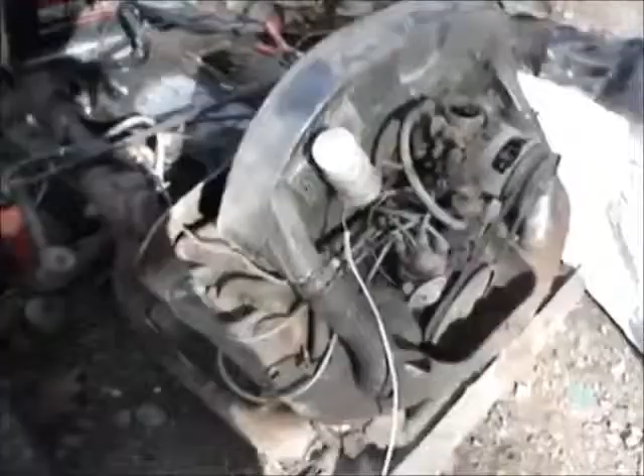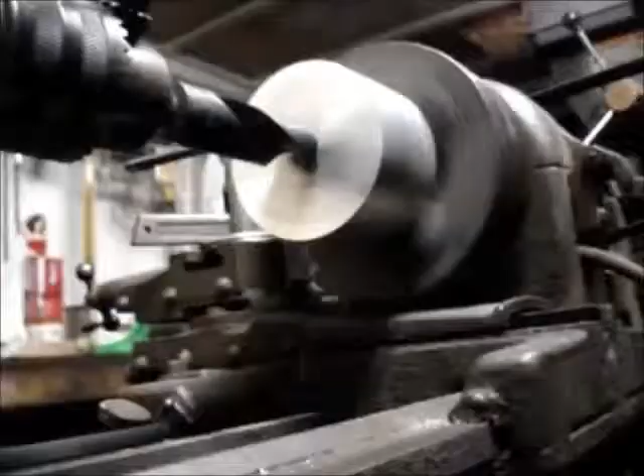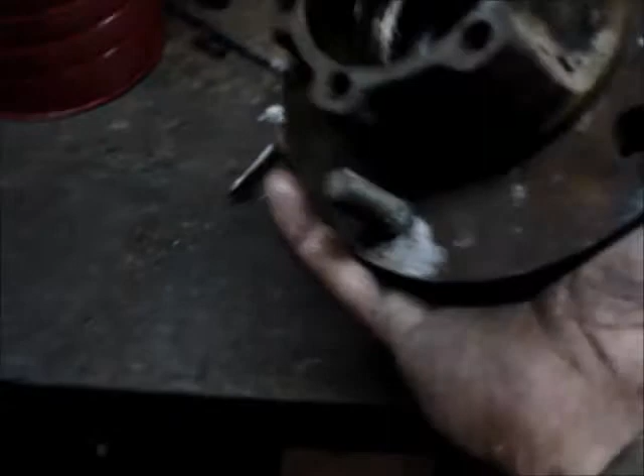The other day, got some new front tires for the Scout, studded snows. I mean, beautiful tires. And went to take the old ones off, and this hub housing, bearing housing, whatever you want to call it, had two of the lugs just started spinning when I went to get the lug nuts off. So anyhow, I got them off, and I'm going to keep this because I can probably ream this out to accept bigger studs or something. But in the meantime, I got to get this thing together.

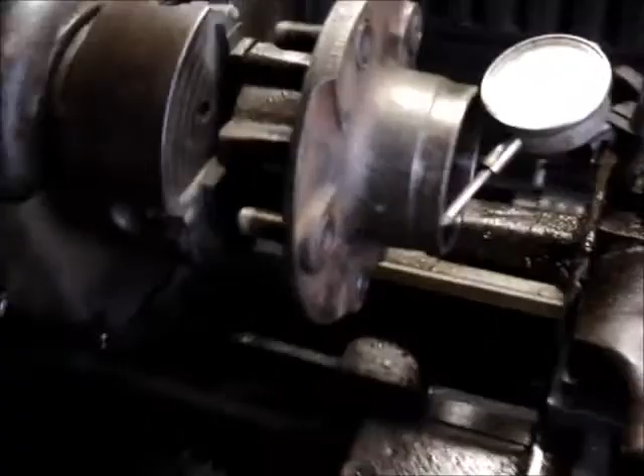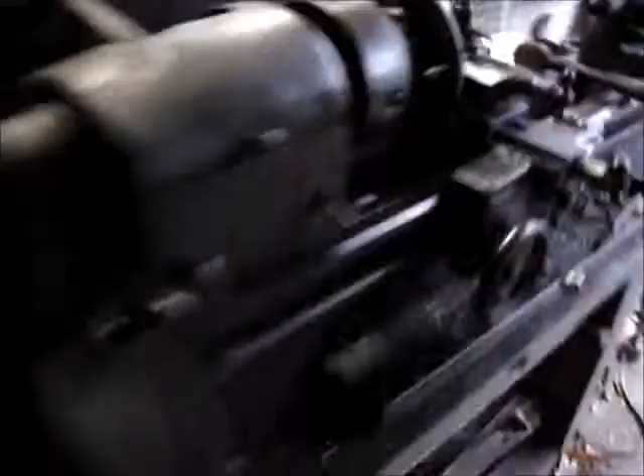Good bearings, good races in and everything, so I knocked out the races and I put them in my spare hub, or wheel bearing housing, or whatever you have. Later on, I noticed slight difference between the two hubs. This hub here is bored out down there for the grease seal. Alright, now that would be a nice fit into there. And this hub, bearing housing, whatever, I'm going to call it the bearing housing. This hub apparently takes a different seal.

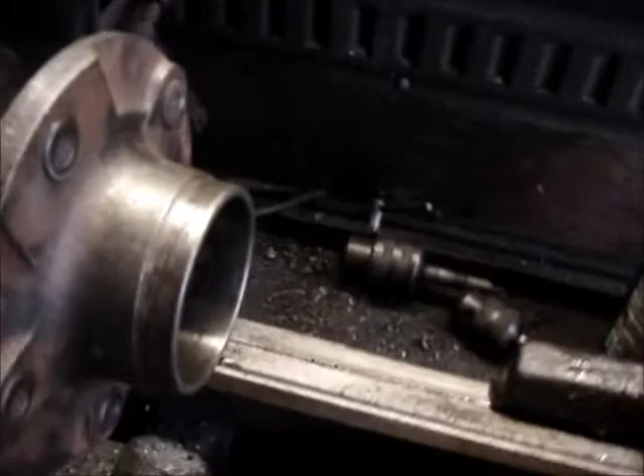And the plan was we would try to find the seal that would just drive right down into there, and we went to the supplier, and he didn't have something that would fit this housing and my spindle. I guess you would call it, yeah, whatever the axle pokes through. You guys probably know what I mean. But this is a great fit onto the spindle, and won't start on there. So this is going to be one job that really matters and is going to have to be precise. So this will be a nice little test

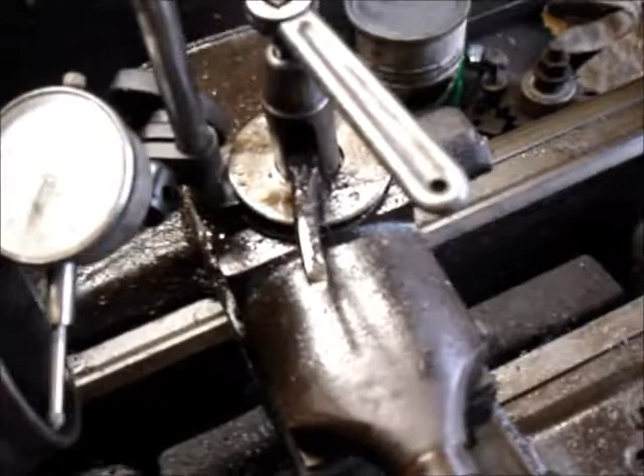of my ability. 55 thousandths out. That's not too bad for just throwing that in. I mean, I can't just start boring that right away. I still got some work to do to indicate that. But that ain't bad, just for chucking it in there, it doesn't usually line up that quickly for me. Alright, looks like the camera picks that up a little better with just a natural light.

Don't drink natty light. Drink good beer.

But as far as I can tell, that is running within or just over a thousandth. Alright, we got the dial set up running the other way. Camera still ain't liking the focus on it too much. But we're really damn close. I can't tell if it's runout or if it's just little irregularities in the surface of the material.

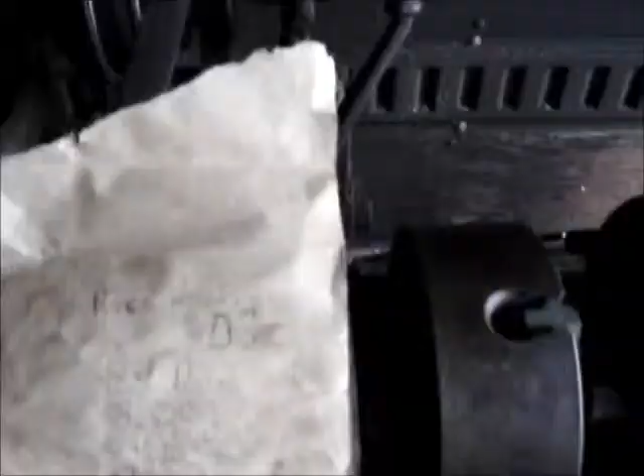Man, seems like you get her dialed in the one way, and then you got to go screw around for a half hour to get her dialed in the other way, and you keep going back and forth until you finally get her. And I'll show you the other axis in a minute here. And here's the other direction, and she's really damn close. I think I got a couple of pock marks in the bore, and it sounds a little rough, but I'm gonna go with that. My race thickness, or height maybe, is 575 thousandths.

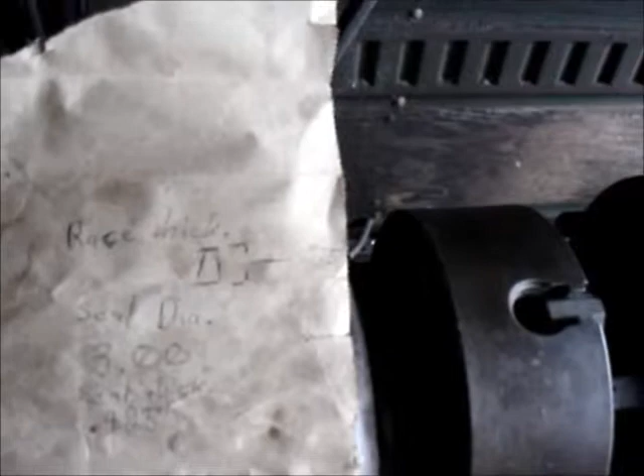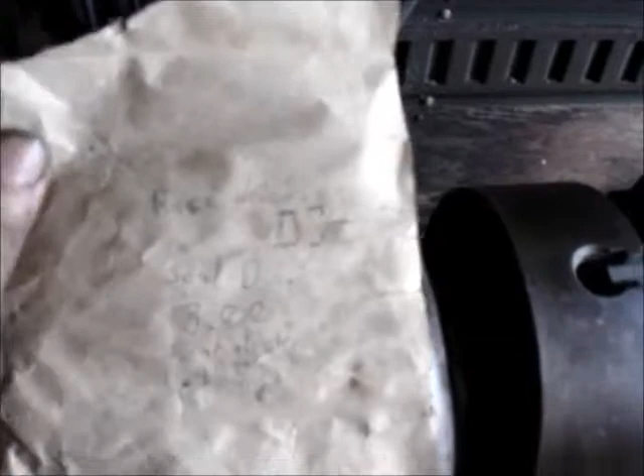So I want to leave at least that much meat inside the bore untouched, so that the race has plenty of surface to press into and rest on and all that good stuff. The seal diameter is 3 inches to the thousandth. I mean, that's three inches right on the money. So I'll be shooting for 2 inches 999 thousandths. Okay, and seal thickness is 425 thousandths. So I like that. I'm working with pretty much nice square or round numbers, you know. There isn't weird crazy stuff going on.

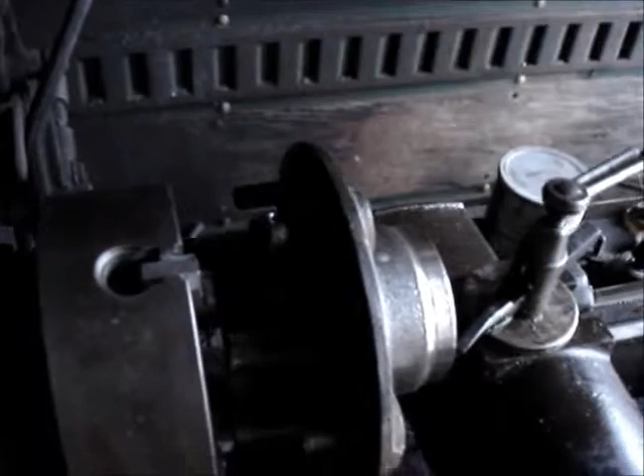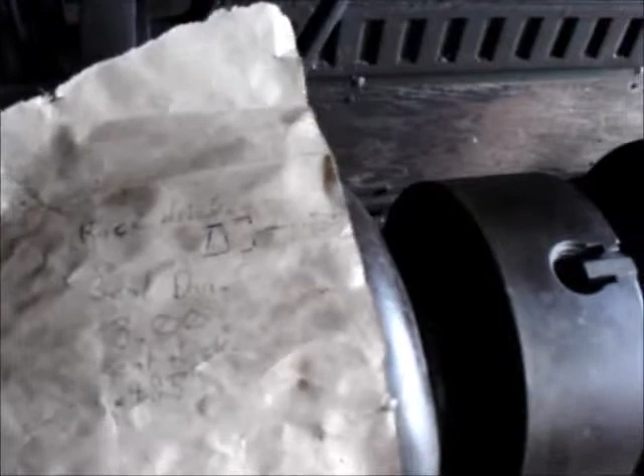I just have to remember to leave 575 thousandths untouched inside the bore of the bearing housing here. And I'm going to bore it out to 2 inches 999 thousandths to press that seal in. And I'm going to try to bore it 425 thousandths deep. So the seal will be sitting all the way in there. I really wish I had some travel dials set up on this thing.

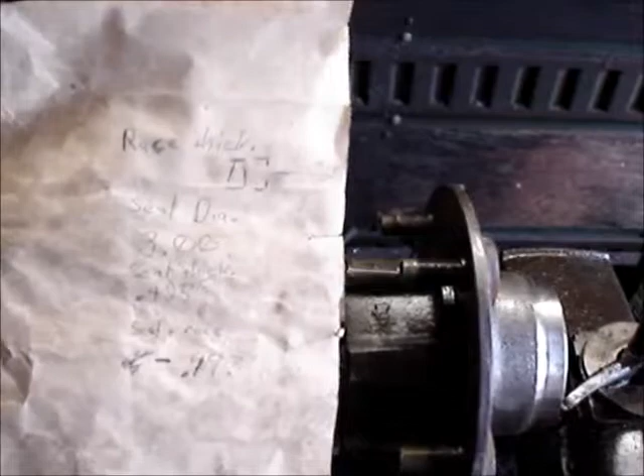I'm sure I could somehow with the dial indicator, but I'm just gonna have to take a cut, just barely grazing it, and go back 425 thousandths, and then just keep cutting to that line, and then I'll bring it out to 2 inches 999 thousandths. That'll give me a good press fit, hopefully. See how it goes.

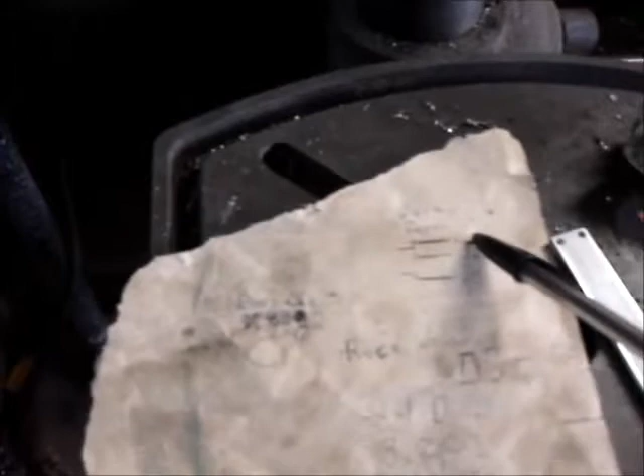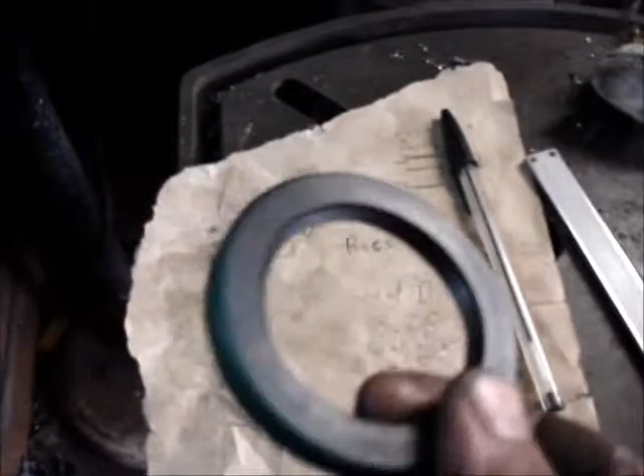Before starting, I did take a couple of other measurements. Bore depth is 1 1/8, so that gives me just a little bit of extra room in there. So I decided that I would bore it about 10 thousandths deeper. That way I know this seal is going to sit up inside of there flush, and I'll have room. The bore diameter was 2 inches 887. That is a pretty good one to know, because you want to know how much you want to take out. And I'm getting real close here. This thing is almost wanting to sit in there, and it might almost go just like that.

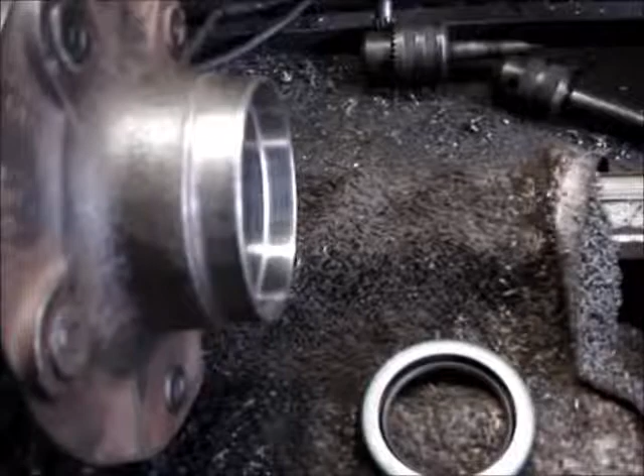Okay, yeah, I just checked her. I got the bore 429 thousandths deep, and my seal is 425, so that should sit just real nicely in there, and this is going to be a good fit. I did take a little sandpaper and just polished it out until I got to where I wanted to be, and I kind of rounded off this edge just a little bit so it ain't sharp and trying to dig at the seal or screwing up my stuff.

This is a cast iron housing here, so I laid an old rag down here to try and keep some of the crap off the ways here, off the bed, you know. I don't know how well it worked, but anything's better than nothing, I guess. Try to take care of this thing. I'm going to take this out of the lathe, stack her together, and see what I got. Let's try fitting this seal. Should be standard stuff if I did anything right.

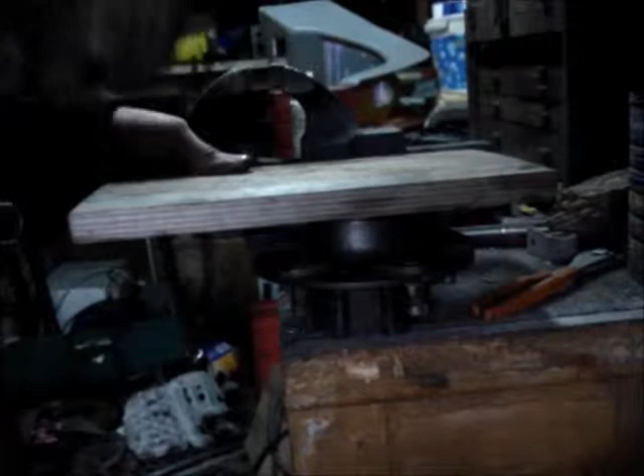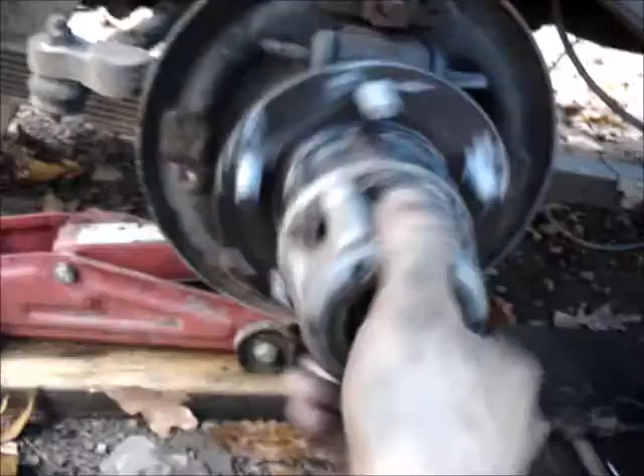Oh yeah. That's beautiful. Why is that on? That don't belong on the floor. So I guess that's one way to do it, huh? Feels nice. It feels like new yet. Old Scout, ready to roll again.